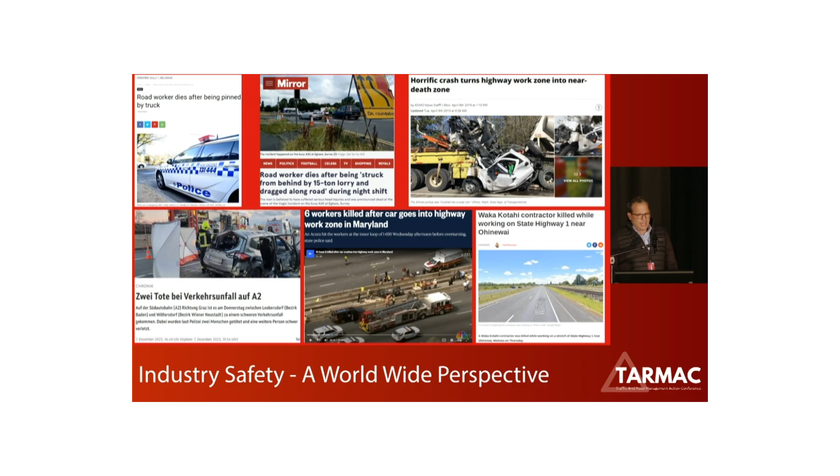Well, according to WHO, it is 1.19 million people dying every year in road traffic. And this is a huge number. It seems even more huge when considering that this equals 4 fully occupied Airbus A380s every single day.

So think about it, these are not just statistic numbers. These fatalities are our families, these are our friends, and these are our colleagues whose lives have been cut tragically short, and the suffering of the people bereaved is terrible.

So, my name is Jürgen Janschitz. I'm the CEO of the Janschitz Group, based in the beautiful country of Austria, back in Vienna, in Europe. And I've been working in the road safety industry for all my life, 28 years now. Together with my team, we are creating and providing work zone safety solutions to help the industry and make traffic management better and safer across the globe.

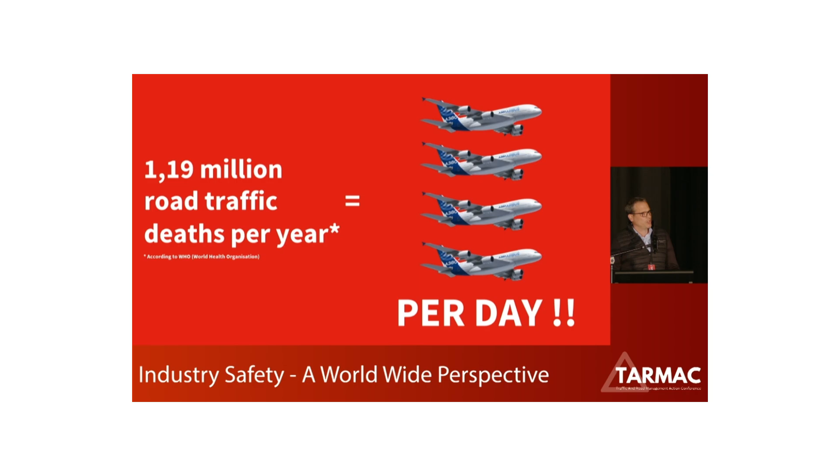And today I'm here to highlight a new groundbreaking innovation that stands to revolutionize traffic management across the globe. But before that, I want to bore you with some statistics. Don't worry, it's not too much, but I need to have them with me because they can highlight the importance of this topic.

So road traffic death is a global burden. The United Nations did a lot of research on that - they've just released a global status report on road safety. And as I said before, the numbers are shocking: it's 1.19 million people still losing their lives on our roads. This corresponds to a rate of 15% road traffic death per 100,000 population.

Of course, this statistic includes all participants, so all fatalities. I'm talking about pedestrians, drivers, cyclists, car and truck drivers - it's all of them. There are some, but in many cases there's no specific statistic on work zone accidents, but it's a high number for sure.

So the good news is, by the way, I brought all these statistics with me, so if you're interested, we can have a discussion on that later on as well.

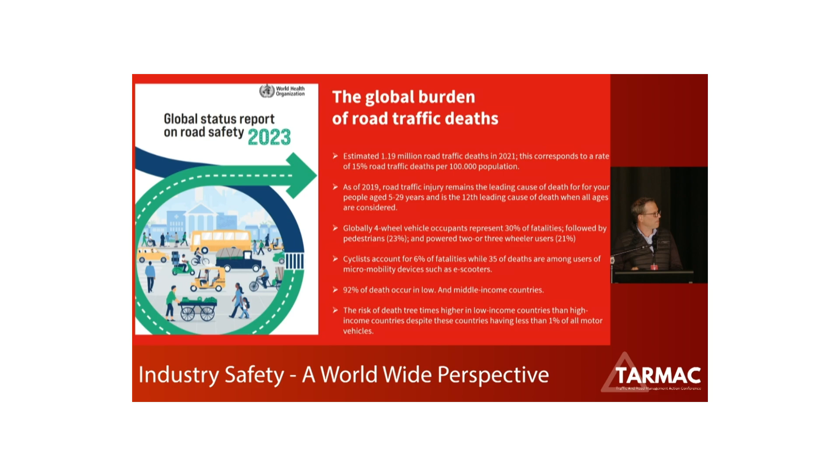So the good news is, things are getting better slowly, but they are. The global number of road traffic deaths is decreasing by 5% since 2010. But there are still parts of the world where it's decreasing very slowly. Others are doing very well - there are 10 countries or areas, mainly in Northern Europe, where they have achieved a 50% reduction in road traffic deaths over the last years.

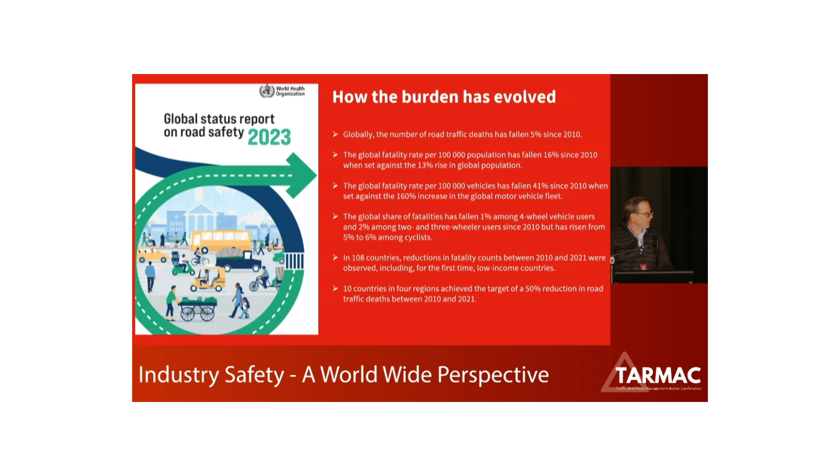So anyway, as I said, this statistic is very general and does not apply to work zone safety in particular, but that's where we are focused. As our urban environments continue to grow and evolve, so too must our approach to ensure safe and efficient movement of vehicles, especially in work zone areas.

So work zone areas are hazardous to workers due to a combination of different factors, and these factors increase the risk of injuries and accidents. Workers very often in construction areas are very close to moving vehicles. These moving vehicles can travel at high speeds, and the risk of being struck by one of these vehicles is significant, especially if drivers are not attentive or if they are speeding.

There is always limited space in work zone areas, or most of the time there's limited space, and this makes it difficult for drivers to maneuver, as well as for workers. These restrictions lead into accidents, terrible accidents, especially when heavy machinery and heavy equipment is involved.

Of course, there's driver's behavior. Many accidents in work zones are caused because drivers are distracted or are speeding. Inadequate signage or sudden changes in traffic patterns can also contribute to drivers' confusion and lead into errors.

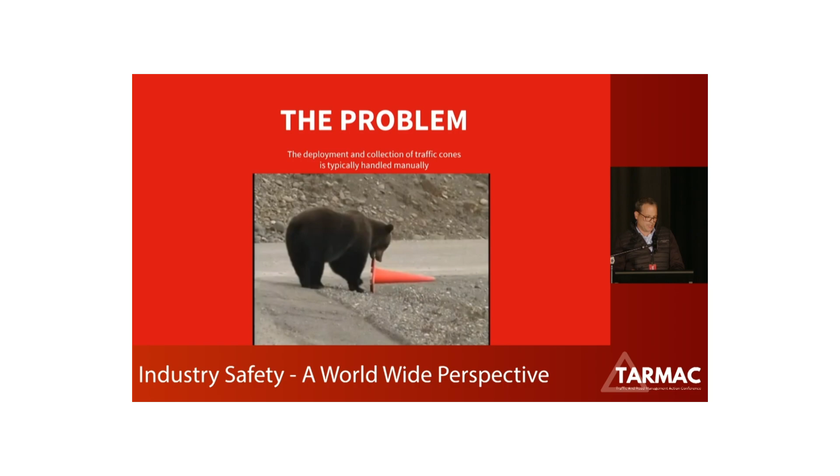There are many things to do, but first of all, we should think about using new technologies, such as automated cone machines. So the question is, why should you use these kind of machines, when it's already working? The reason is very simple: as for today, we are doing the job by hand. All the cones are deployed and collected by hand in most of the cases.

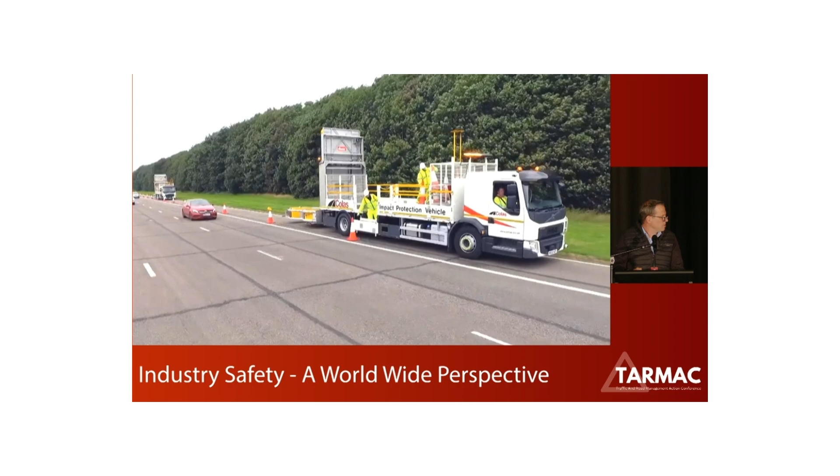Number one, it's dangerous to the life of workers. It needs at least, as you've seen in these pictures, 2, sometimes 3 people to do the job, and these people have to remain on the flatbed of the truck.

It is hard work. Give you an example: you do a 5 kilometer lane closing, which is pretty normal in Europe. You put a cone out there every 25 meters, you end up with 200 pieces of cones. Now consider the weight of a cone is on average maybe 5 kilograms, so this team is handling 1,000 kilograms just to bring out the cones, and another 1,000 kilograms to collect them. So it's 2,000 kilograms just to close one job site. I'm not the guy bringing this out, but for me, this sounds pretty tough.

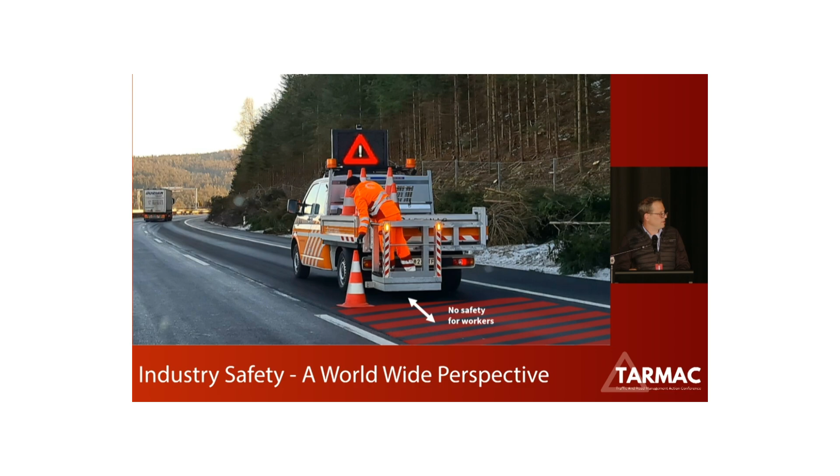Look at this normal situation, you see it all the time. Look at the truck — there is no safety on the backside of the truck, so those people are exposed to traffic. Imagine a car or a truck hitting this vehicle. Same if you look from the side: there's only 20 centimeters, if you're lucky, of distance between this guy and the oncoming traffic. Imagine a car or a truck even brushes this guy — I think the chance to survive is very small.

So what are the benefits of these automated machines? First and foremost, it's a safety aspect for both workers and motorists. As I said, traditional methods of placing and removing cones are done by hand, and road workers find themselves exposed to danger from oncoming traffic, particularly during nighttime operations, in tunnel operations, or in bad weather conditions. Fully automatic cone machines can be operated by the driver only — there's no need for somebody to remain on the flatbed of the truck, which reduces the need for human presence in this area and increases safety.

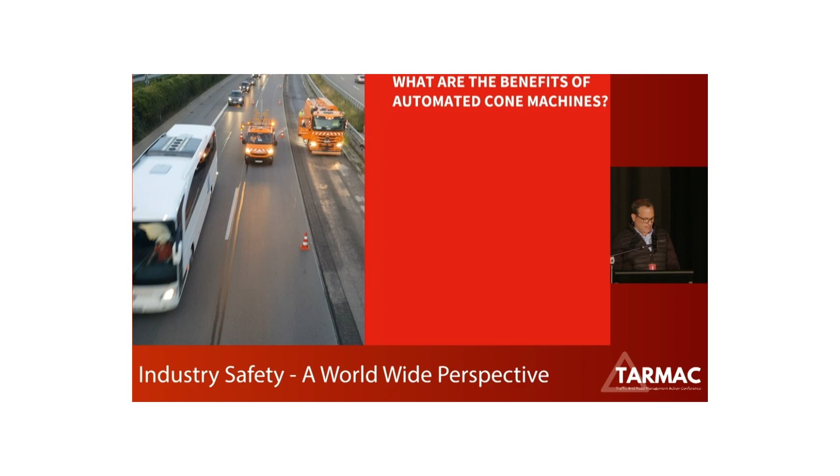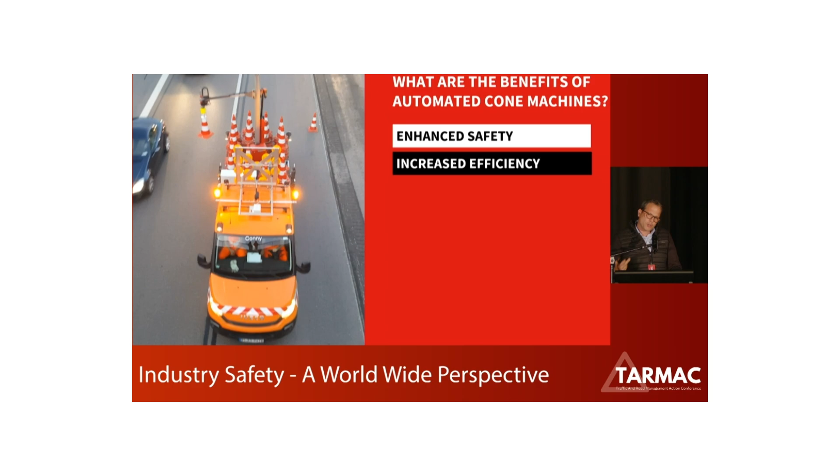Increasing efficiency — these machines increase efficiency because only the driver needs to operate the machine. These machines are equipped with sensors and robotics and allow cones to be deployed fully automatically.

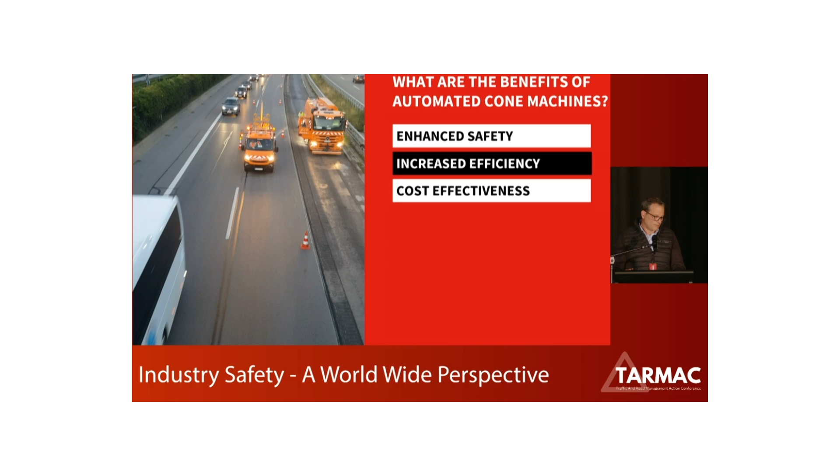It's cost effective. Economic benefits of automatic cone machines are substantial. While the initial investment may seem relatively high, the long-term savings are very considerable. Automation reduces the need for extensive manual labor, thereby lowering labor costs. Over time, these savings can offset the initial expenditure and result in a more cost-effective approach to traffic management.

These machines are environmentally sustainable. In today's world, where environmental concerns are at the forefront of public policy and business practices, it is crucial to consider the environmental impact of all our actions. Automatic cone machines can help optimize traffic flow, resulting in less congestion, shorter travel times, and a more productive urban environment. Smoother traffic flow also means fewer idling vehicles, which leads to lower emissions and improved air quality. By adopting these machines, we are taking a step towards greener cities and a healthier planet.

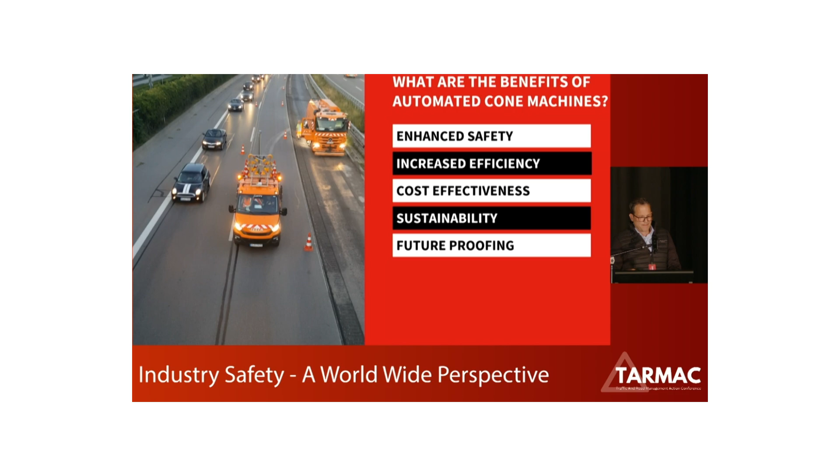Of course, those machines are future-proof. Automatic cone machines are highly adaptable. As technologies continue to advance, these machines can be upgraded with new features and new capabilities. They can be integrated into smart city infrastructure, using data from various sources to optimize their operation. This adaptability ensures that our traffic management systems remain cutting edge and capable of meeting the challenges of tomorrow's urban environment.

Automatic cone machines are very reliable and consistent. Humans make mistakes, and stress, distraction, as well as varying levels of experience can all impact the effectiveness of manual cone placement. Automatic cone machines provide consistent and reliable performance every single time. Their precision ensures that cones are placed exactly where you want them and where they are needed, reducing the likelihood of errors that could lead to confusion and accidents.

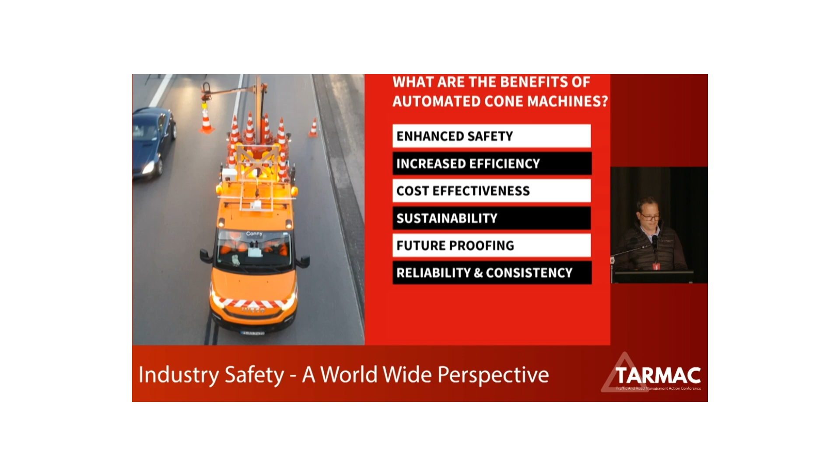Last is enhanced traffic flow. By ensuring cones are placed and removed with precision and speed, automatic cone machines help maintain a smoother and more predictable traffic flow. Where is this important? Especially, of course, in high traffic areas during peak hours. With automated systems in place, we can avoid unnecessary congestion and improve the overall travel experience for all motorists.

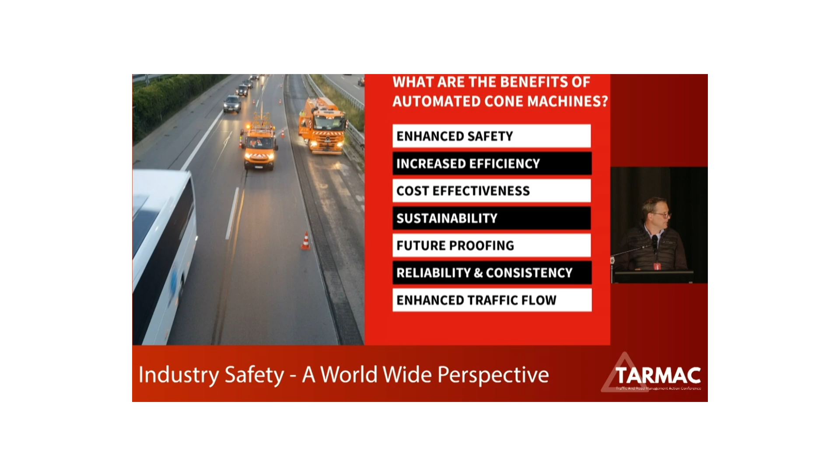So the conclusion is the adoption of fully automated systems offers a multitude of benefits. As I said before, it's enhanced safety, it's the efficiency, it's the cost savings. These machines represent a significant advancement in how we manage our roads. And as we look towards the future, it is essential that we embrace such innovative technologies, ensuring that our work zones remain safe, efficient, as well as sustainable for all generations to come.

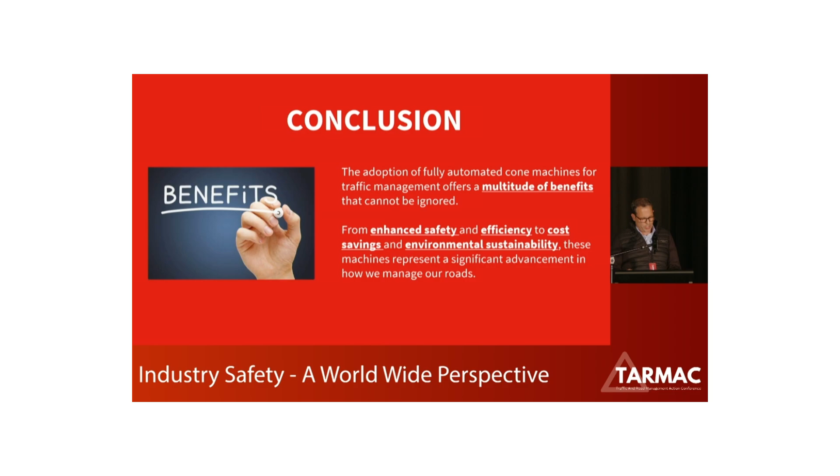So, what is important when considering an automatic cone machine? Look out for a well-known manufacturer. There are plenty of options out there. Talk to the industry and find a well-known manufacturer. Make sure you understand that you need a fully automatic cone machine.

I brought some pictures right after this slide, so I will explain the difference right away. Think about flexibility. Do you need a cone machine that is dedicated to a specific vehicle, or do you need maybe a smaller machine that you can interchange, so use it on different vehicles? Think about it.

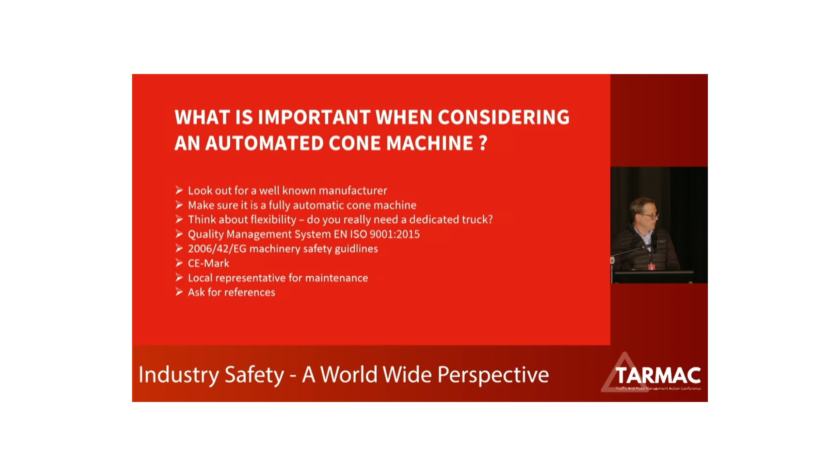Think about quality standards, machinery safety guidelines, CE mark, and all these. Most important, ask for references and find a local representative. So if your car breaks down, you go to a car shop. If your truck breaks down, you go to a truck shop. Same with a cone machine - it's a piece of technology and somebody has to maintain it. So the best advice I can give you is go out and talk to the industry, get advice from experts, and find the machine that suits your requirements.

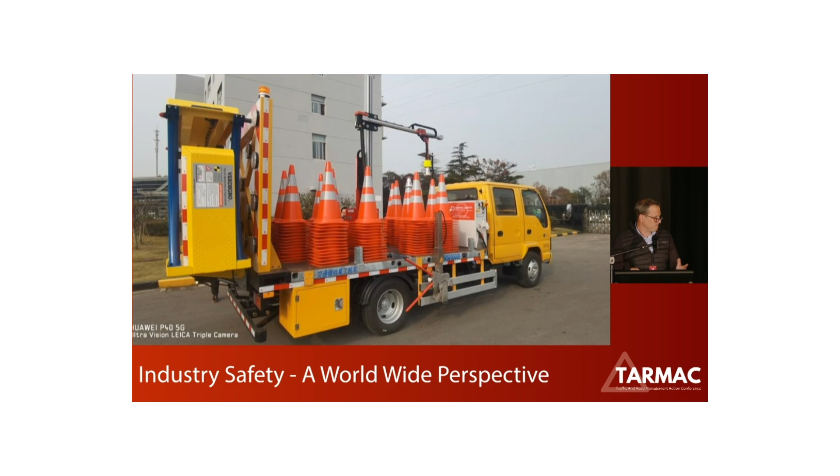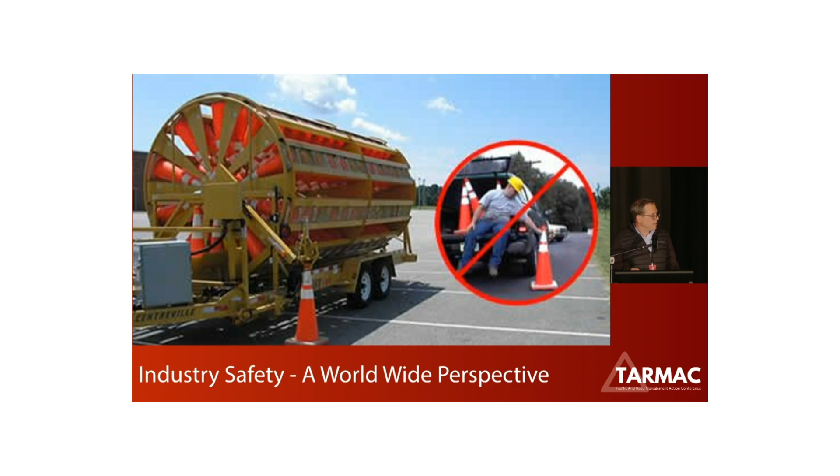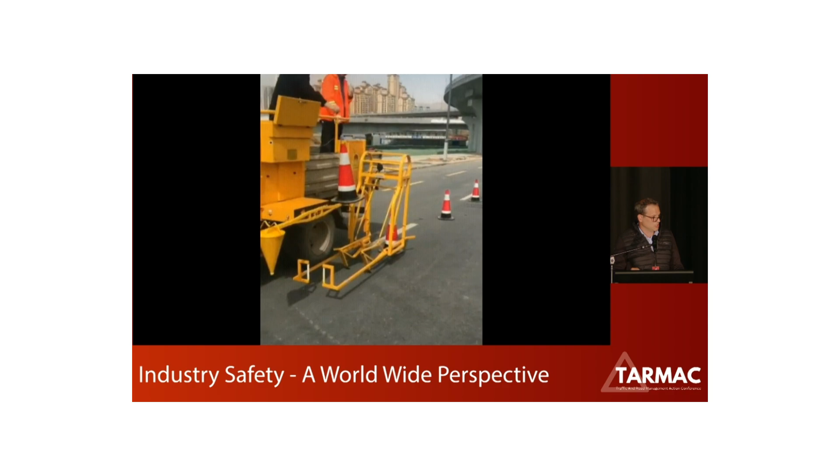There is a wide range of machines already available, and here are some examples. That's a smaller machine. Well, that's an example from England. Big truck, trailer version. This is what I mean with automated cone machines. Here you can see this machine, I call it semi-automatic, because somebody has to remain on the flatbed of the truck - so no good. Here's another example from the Netherlands. I think this is from Australia, not sure. It's another one. Here's a US one, again semi-automatic - people have to remain on the back of the truck. This is what I mean with tunnel operations, so very, very narrow, very important to have nobody on the flatbed of the truck. Again, an American solution. This is France.

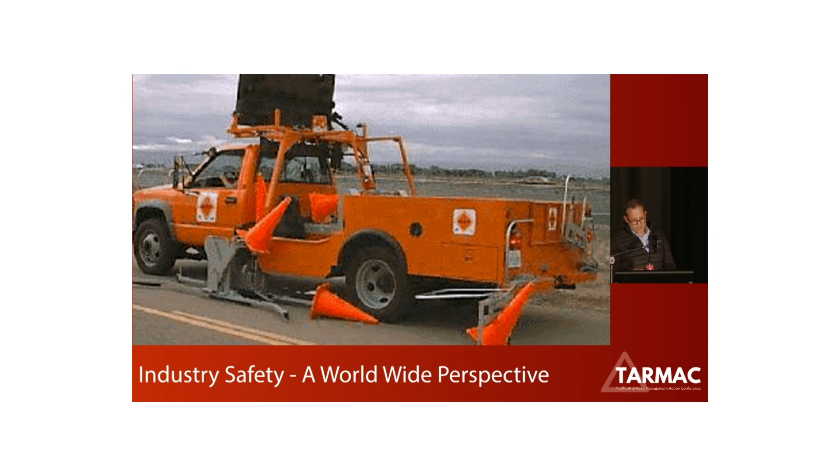And this is the machine. We just recently brought it to New Zealand. It's out there, so they are showcasing it. Go out and check the machine, ask your questions, have a look. You're more than welcome to do that.

Long story short, I'm almost done. So what is important? All of us have to take responsibility. We have a shared responsibility, and we all need to take action. Whether it is the public authorities, the traffic management companies, the governments, the road operators, concessionaires - everybody has to take action.

For me, it's important - road safety and traffic management is a very personal concern, and I want to express the importance of this topic and encourage all of us to find good solutions and protect all these workers out there on our roads. We must always be aware that every statistic number represents a human life, and it's our collective responsibility to ensure the safety of those who build and maintain our infrastructure. So let us work together to ensure that we all return home safely to our families every day. Safe rides, safe lives. Thank you very much.